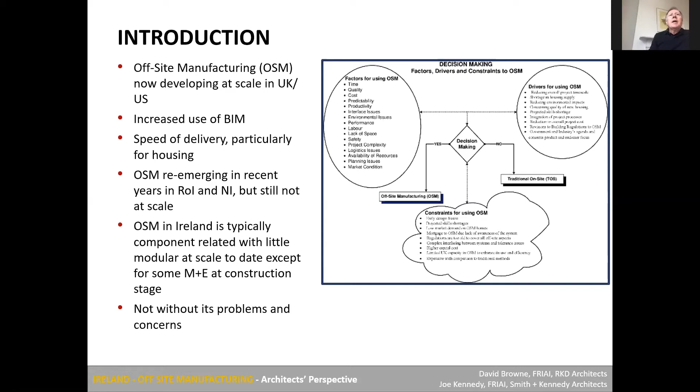Consequently, OSM in Ireland is typically component related, with little modular, except for some M&E construction. And as Joe mentioned, it's not without its problems and concerns.

One of the big issues in relation to modular particularly is the finance model, because traditional construction payment is made for completed work on site or vested materials. But with OSM, the model is different.

You need upfront investment to manufacture the product. You need R&D to certify the systems before they're manufactured and accepted in different markets. You need earlier payment before OSM units are delivered, which is quite a difference compared to the traditional system we work on. There are higher pre-planning and design costs and front-loaded payment risks for the client. Critically, the module supplier, the manufacturer, now becomes a big part of the supply chain and is critical for the delivery of projects on time.

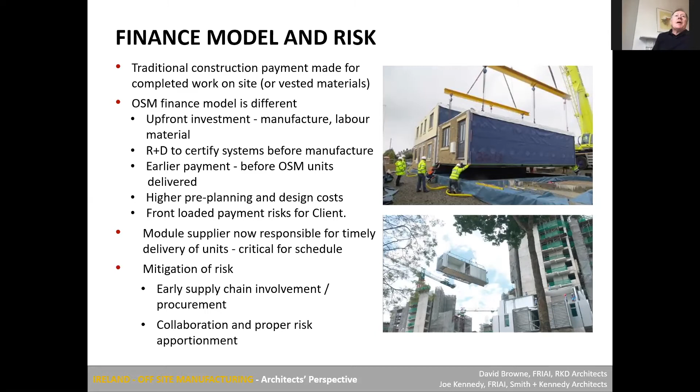So we need to look at mitigating risk with early supply chain involvement, and that, I believe, is critical - from talking to colleagues in the UK, you need to be speaking with the manufacturers from the get-go, and you need a lot of collaboration and proper risk apportionment.

In terms of quality, there's certainly potential for higher finished construction quality, but there are risks, and I think these need to be insured.

There's durability and maintenance. One of the classic ones with timber frame constructed houses was the vulnerability of the moisture membrane, which on site was very susceptible to breaking and therefore long-term issues.

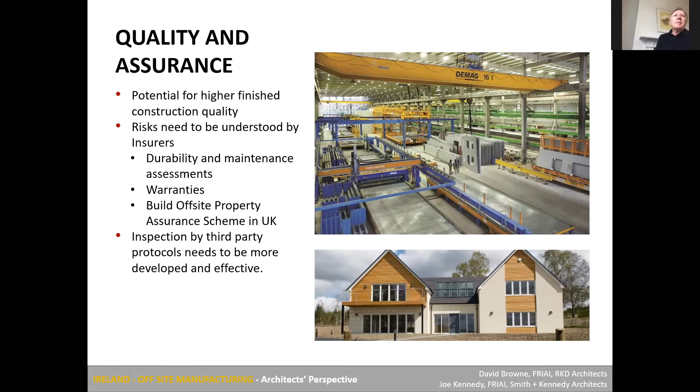So there's a big need for warranties, and there is a model in the UK, the Build Offsite Property Assurance Scheme, which might be emulated here. The other important thing is that new inspection protocols for third parties, the architects and engineers, need to be developed so they can be related to offsite manufacture.

One of the really big issues is that early design decisions are critical. Traditionally, a design is produced, planning permission is obtained, detailed design begins, and then value engineering starts. That can't happen now. You need to get in and do your value engineering right at the start of the project, so that by the time you're going to planning, you have a real vision of the finished product.

And that will need new design management approaches. You can't carry out change management after manufacture commences - the consequences are just too big. So you will need experienced project planners, experienced designers, and manufacturers who know what they're doing.

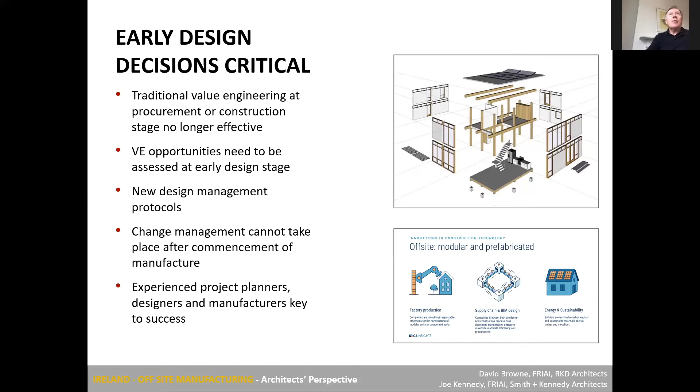So potential advantages of off-site manufacturing. Well, obviously you now are building in a controlled manufacturing environment, so you have the potential for much improved quality. You've better conditions for the workforce, better efficiency, and better health and safety.

And then in terms of speed, you can complete the modules in parallel or even before early construction. You will achieve faster on-site erection, up to 60% in some cases. There's less on-site work for construction personnel, which has its pluses and minuses, as Joe will talk about.

OSM can be efficient for city centre sites because of the speed and ease of craneage. You can get big reductions in construction waste and reduced snagging. And early decisions, if carried out in a disciplined way, will hopefully reduce the potential for on-site delays

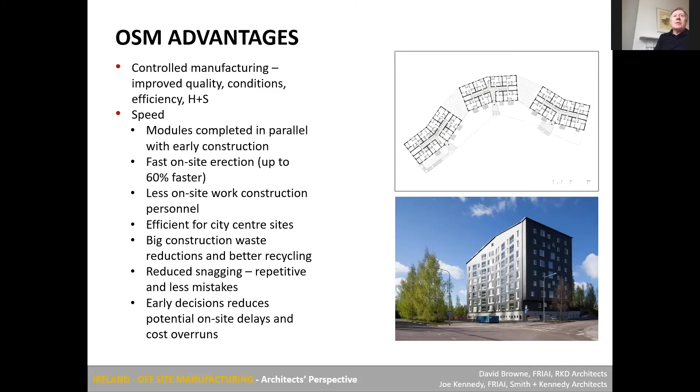and cost overruns. Okay, Joe, back here now. Let's look and maybe discuss some of the problems, the issues, and the concerns that really do need to be explored. David mentioned the greater risk for the client due to earlier payments.

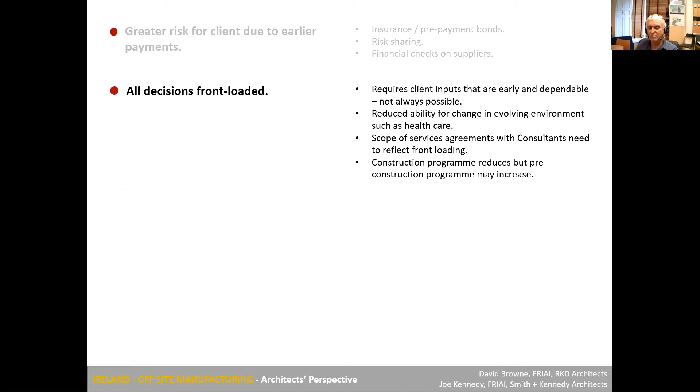There are things that can be put in place to protect the client, but it's still a risk, even with prepayment bonds and risk sharing. All the decisions are front-loaded. That can bring significant problems in an evolving brief, particularly in things like healthcare, where technology changes almost every year. And with long procurement processes, where procurement starts but the project isn't delivered for several years, such as in schools, these front-loaded decisions are sometimes not that easy to get nailed down.

And then some of us have concerns about the standardization that comes from BIM and other ways of procuring design, especially if we're designing for established ways of delivering modular construction, where there's a move away from bespoke solutions. That has a lot of advantages, but it will also restrict, if we're not careful, the innovation in design that has led to our buildings in cities evolving over many years and changing with the times. So that commoditization of building requires responses in design that will protect design quality, especially in urban areas.

And then there's the local employment impact that David alluded to. I've spent some time in Kenya in the last few years, and it's noticeable there, where the Chinese are doing a huge amount of construction, that they bring everything with them. They bring modular construction, they bring their own staff and workers, and there is very little positive impact on the local economies, very little local employment. That's a significant concern in developing countries that we should be aware of, and there need to be facilities put in place to try and address that.

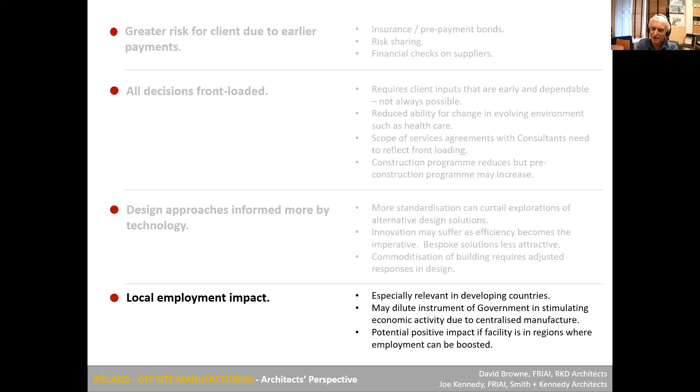One company we've worked with in the past, a UK company, Chapman Tracy, had systems where they used to build a factory on site and then employ local people to do the prefabrication. So it was barely off-site manufacturing, as against full off-site manufacturing.

Specialized versus general skill sets. Lower skilled workers are less likely to be required in OSM.

And then quality. Errors that are made in the off-site manufacture are embedded forever in the project if they're not caught at the pre-erection stage. Now, I know we can have very strong quality control measures to try and stop that, but it's something we should be aware of.

And sometimes errors can't be spotted early because of evolving knowledge of things like, say, pyrite. I know pyrite isn't relevant in itself, but something that evolves as a problem later can get fully embedded in a project. And also repairs can be more

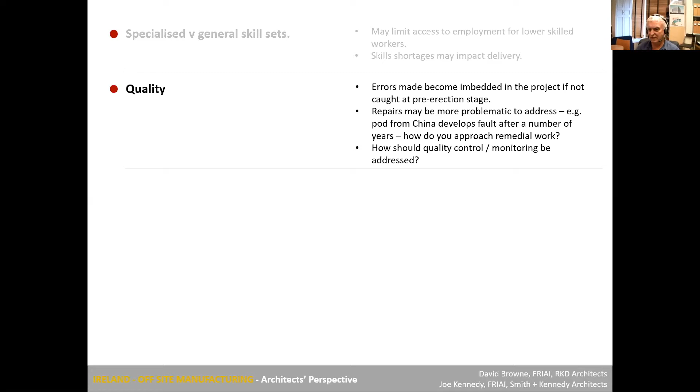problematic to address. Say, for instance, a bathroom pod comes in from China and three years later there are problems with the plumbing. How do you fix that? You can't go back to China to get the fix, and nobody in the vicinity has done any of the work. So there are issues that need to be looked at.

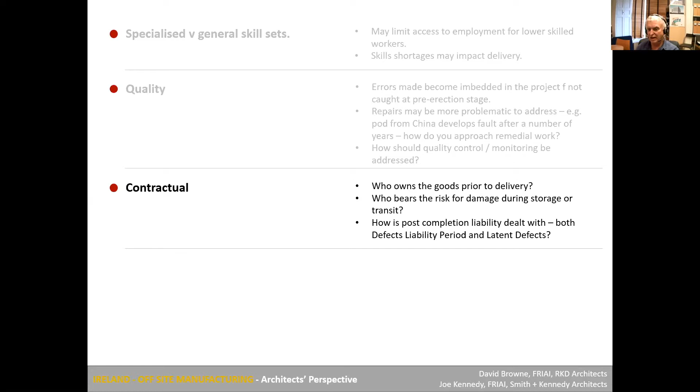Obviously, there are contractual issues, and I'm sure they can all be dealt with, but they need to cover things like who owns the goods prior to delivery, who bears the risk of damage during storage, and how completion liability in particular is dealt with.

And then there's BCAR and regulatory issues. We won't really know until the first case goes through the courts, which is inevitable under BCAR, what liability is attached to inspectors and certifiers in relation to OSM.

The BCAR system is a blunt and very onerous system, as we all know. It has advantages and disadvantages, but how we adapt the code of practice to deal with inspection and certification off-site needs to be thought through in conjunction with the department. I don't think the current code can be adapted properly to cover the inspection risks and protocols for OSM.

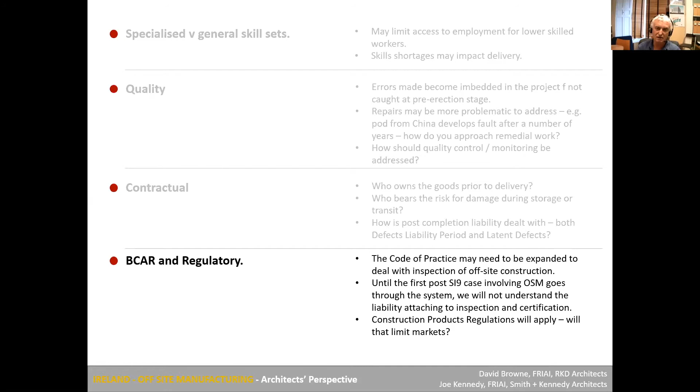And then finally, the coronavirus - will it lead to permanent changes in building? To some extent, I think it will. I think there will be a move away from having close quarters work that isn't necessary, so that might mean making our modules larger than they are at present, like our unitized window systems.

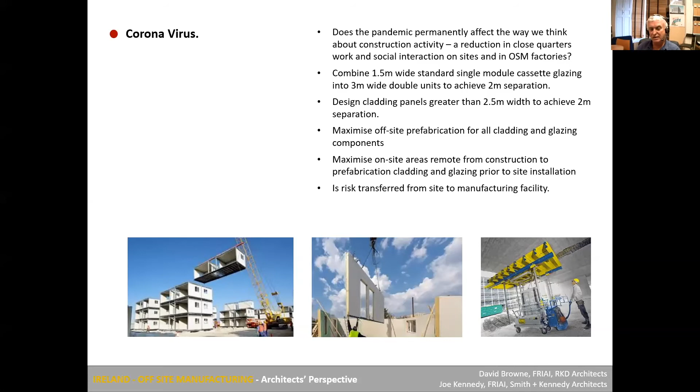The 2 meter distance isn't going to last forever, probably not even through the summer, so that's not going to be a permanent protocol. But I think there will be a change in trying to reduce people working really closely together. OSM certainly has a role to play there, but it does transfer the risk of infection in future pandemics, possibly away from the building site and into the factories.

Back to you, David. Okay, thanks, Joe. So how does BIM support OSM?

Well, I think BIM and the 3D model that comes out of it does give greater precision in specifying material requirements. So it may help with reducing over-ordering and will help, I think, in decreasing construction site waste. I think it's particularly important in helping fabricators and contractors with 3D models of element positions so that you can accurately represent the geometry, hopefully the behavior and the properties of the different components that go into the various modules.

I think it can help facilitate putting those components into the standardized building elements or volumes. And then it also allows much more direct interfacing and collaboration between the designers, the suppliers, the manufacturers, and the users. And I think it can help avoid lead-in times, high costs, and modification problems.

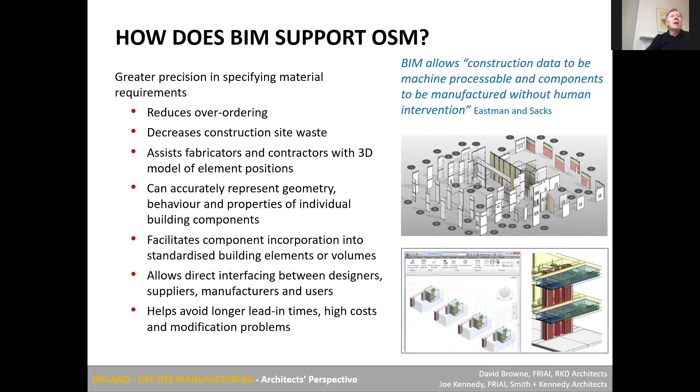Although one consequence of working with OSM and BIM is that I think it will put a lot more pressure on the designers at the front stage, because so much of the process is front-loaded. And therefore the incorporation of standardization will, I think, greatly assist in having BIM support OSM.

So I have a number of examples and then a case study to take you through. And I think these are kind of representative of what the state of play is in the market here in Ireland at the moment. So here's some typical examples.

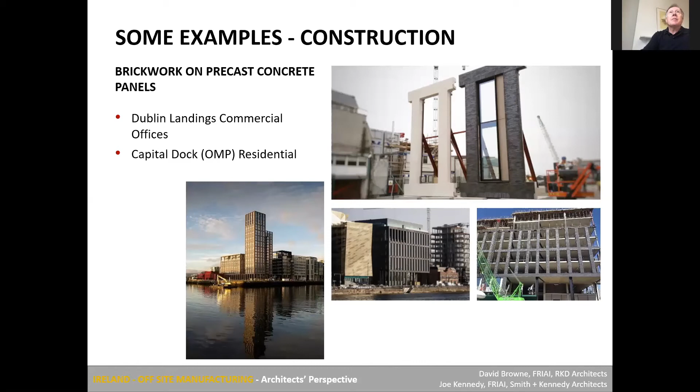Dublin Landings and Capital Dock, which are recently completed commercial projects, they both incorporated brickwork on precast concrete panels. If you take both of those buildings, they look like brick-clad buildings, but in fact they're based on a precast system. I think everyone is familiar with unitized cladding and glazing facades.

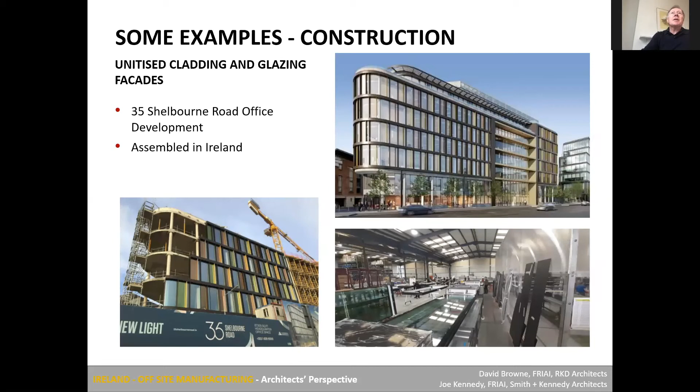This is one going up at the moment on Shelbourne Road in Dublin. And interestingly, this and the next project were both assembled in Ireland, which is a step forward. Again, both these projects were built on 1.5 meter modules, but I'd be promoting moving to 3 meter if that were possible. This other one is 76 Sir John Rogerson's Quay.

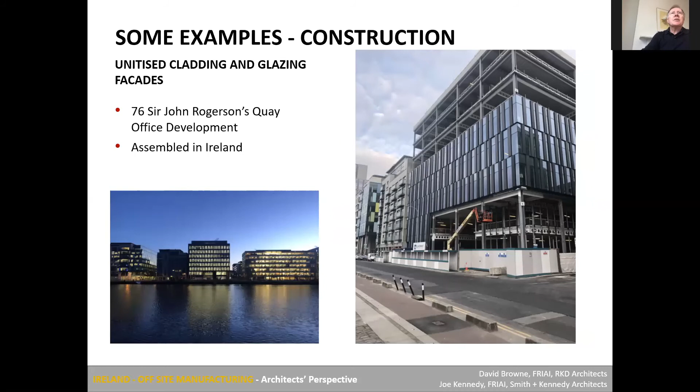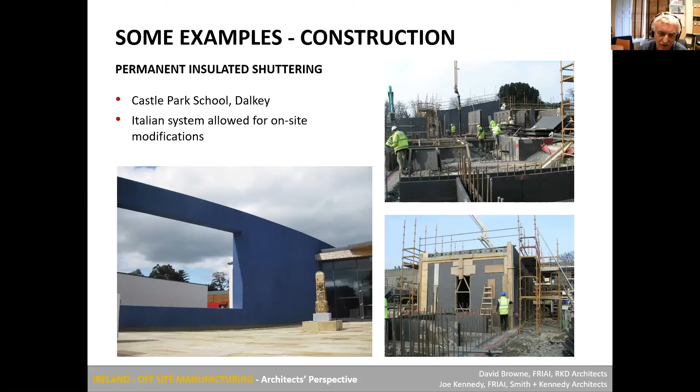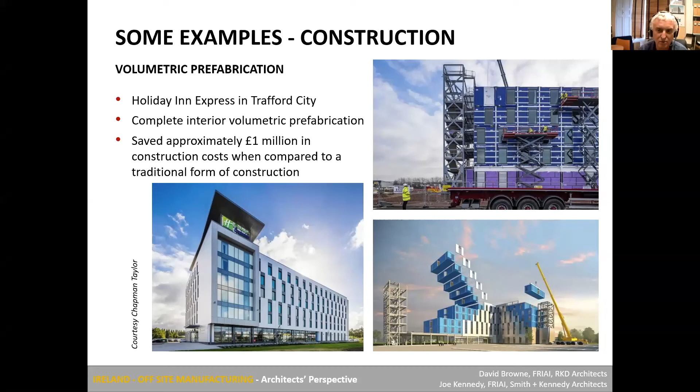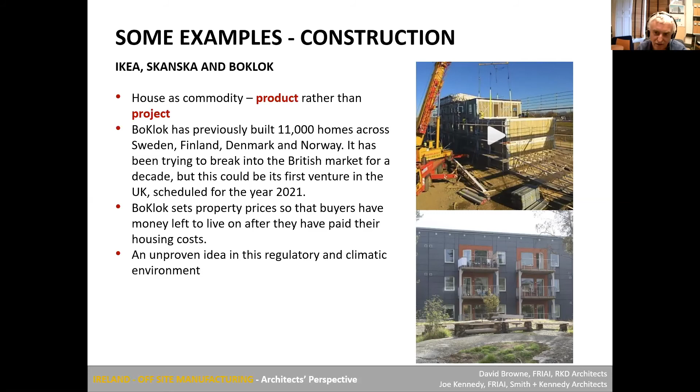It's an unproven idea, I think, in our regulatory system here, and possibly in our climatic environment as well. These houses are designed for cold, dry climates, and Ireland has a particular problem with this type of construction because we've got a very high humid cold climate. So where our dew point, for instance, in our external walls occurs in a different position than it would in Sweden.

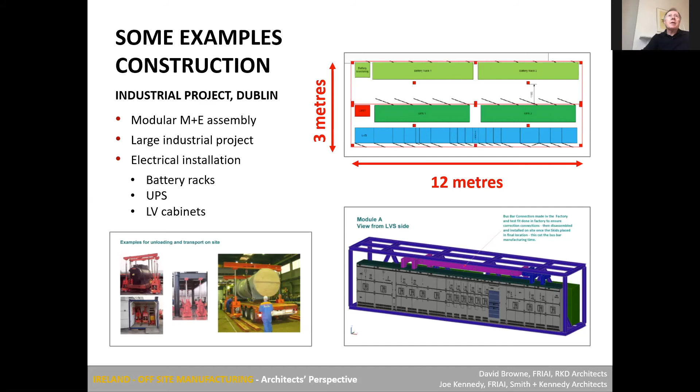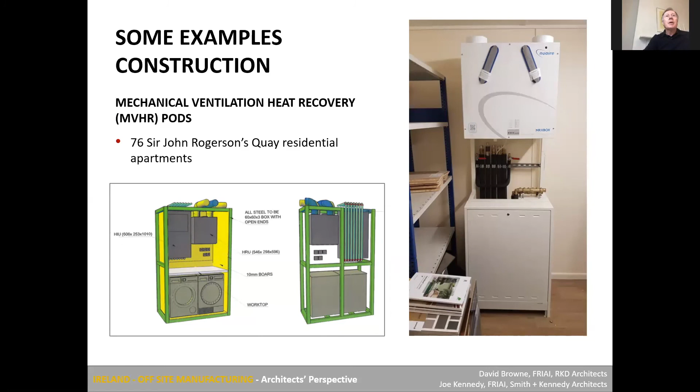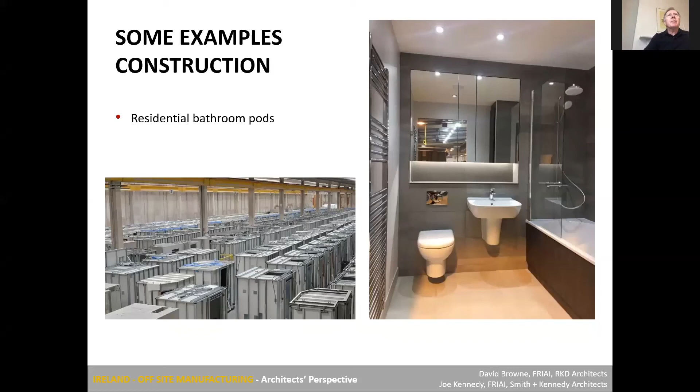Okay, the next one then. I think everyone is familiar with residential bathroom pods at this stage. They've been in the market for the last 20 or so years, and I don't think I need to say much more about them. Here's another interesting hybrid.

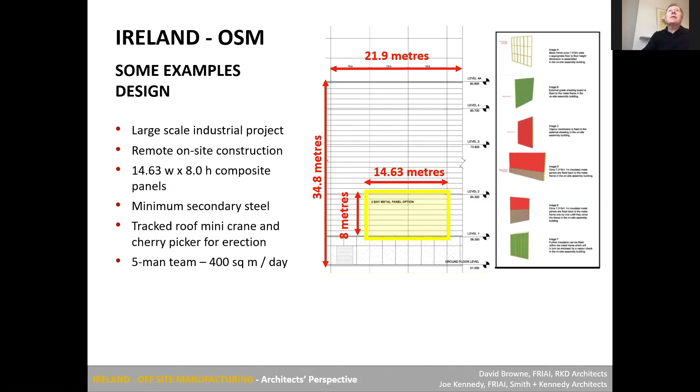This one is at design stage for a large-scale industrial project. As you can see, it's a big facade, 35 meters high, and a couple of 100 meters in length. But here, instead of putting in individual cladding panels, the idea is that we will be making up composites of about 15 meters by 8 in size. And then they would be lifted into place using a tracked roof mini crane and a cherry picker. But we've estimated that a 5-man team can get through 400 square meters a day - that would be with on-site construction remote from the actual construction activity.

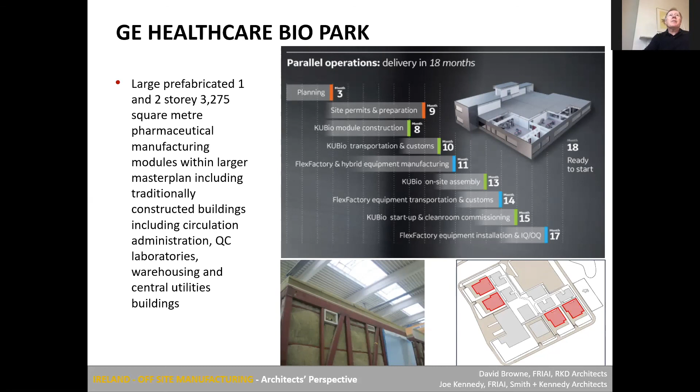And then just take you quickly through a case study that we did for GE Healthcare at their biopark in Cork. So this was large - here, as you can see on the bottom right, there are 4 modules within a larger complex of your typical manufacturing area. There's warehousing, offices, laboratories, and a large energy center. And these modules are 1 and 2 story, 3,275 square meter pharmaceutical manufacturing modules.

If you go to the next one, this is what one of the finished versions look like. It's CGMP compliant, and it's designed for scalable and cost-efficient production of pharmaceutical and biopharmaceutical manufacturing. So the modular units are pre-validated along with processing equipment, and then transported to the site where they're assembled. And GE say that you can go from project inception to completion within 14 to 18 months.

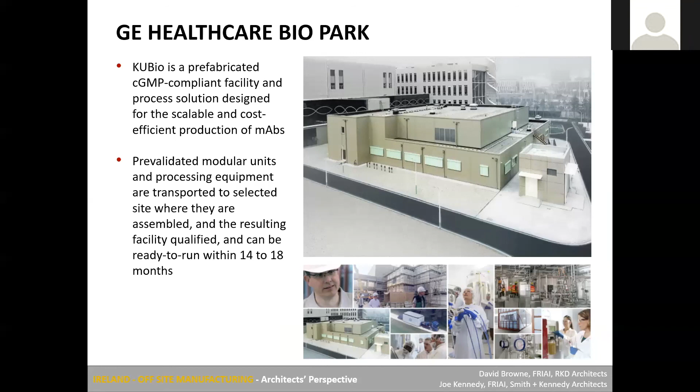Interestingly, I'll show you what happened on our project in a sec. If we go to the next one - so what we have is the 4 production modules, they're called KUBios. They've a total area of 13,100 square meters. They're broken down into prefabricated units of 4.5 by 9.6 by 4 meters high, based on transportation. They're supplied complete with all interior building finishes and services installations, and they are prefabricated and pressure and integrity tested off-site at the manufacturer's premises, which is in Germany.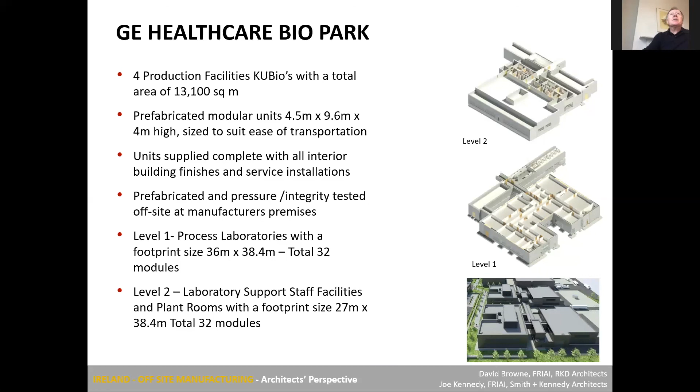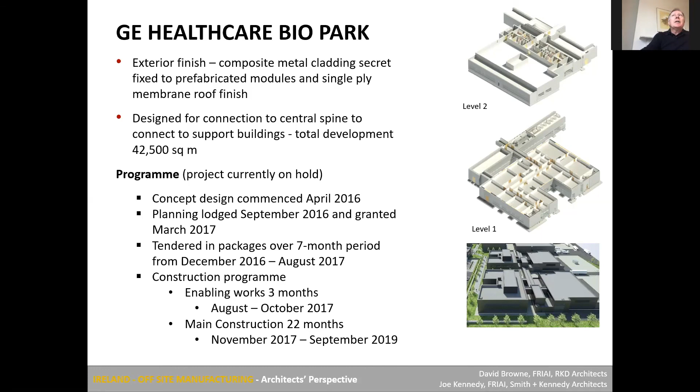Next slide. So exterior finishes, composite metal cladding, secret fixed to modules, and then it's designed for connection to a central spine, and the total development was 42,500 square meters. But the timing is interesting - the concept design started in April 2016, and we got through to planning by March 2017. It was tendered during the planning stage over 7 months, from December 2016 to August 2017. And we had a construction program with enabling of 3 months, and then a construction program of 22 months. So a little bit longer, but I think the real gain that the client saw was the quality that they would get in both the finished building and in the service installation that was supplied.